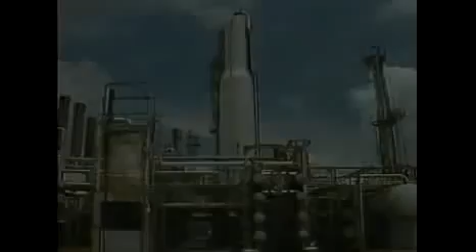One of the key elements of many process plants is a distillation system. It's important for operators to understand how distillation systems work because it's part of their job to make sure the systems run properly. The purpose of any distillation system is to separate a liquid mixture into two or more components. The separation takes place in a distillation column or tower.

The liquid mixture is called feed or charge, and the components into which it's separated are called cuts or fractions. Let's take a look at a simplified representation of a distillation system. In this example, the feed is stored in a tank. During operation, a pump is used to move the feed from the tank to a preheater. In the preheater, the mixture is heated under pressure to just below its boiling point.

The pressure in the tower is lower than the pressure in the preheater. So when the feed enters the tower, it starts to boil. The vapors from the boiling liquid, which primarily contain the lighter components in the feed, rise in the tower. The remaining liquid, which consists primarily of the heavier components in the feed, moves down the tower and collects at the bottom. Some of this liquid is drawn off as the bottom's product, and some of it's routed to a

device called a reboiler, which is connected to the bottom of the tower. The reboiler is usually a heat exchanger that's designed to vaporize the lighter components that remain in the liquid from the bottom of the tower. Vapors from the reboiler, or in some cases a mixture of vapors and liquid, re-enter the tower. The vapors then rise up in the tower. These vapors and the heat they contain are often referred to as boil-up.

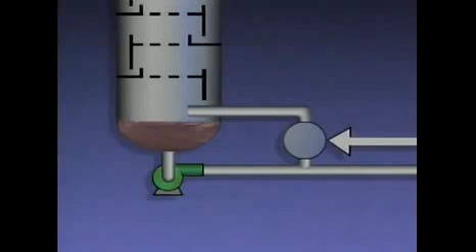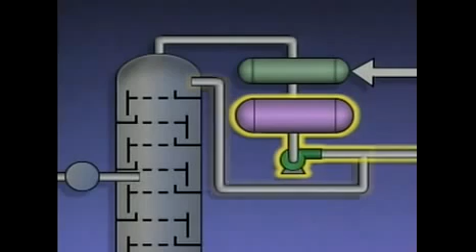The hot boil-up provides heat that's needed for the distillation process to take place in the tower. The vapors that rise up in the tower are routed to a condenser. The purpose of the condenser is to cool and condense the vapors into liquid. From the condenser, the liquid flows into a receiver or accumulator. The receiver provides a reservoir for the liquid. Part of the liquid from the receiver is pumped back into the top of the tower, and part of it is drawn off as the tower's overhead product.

Well, we've just looked at one simple example of a distillation system. Not all distillation systems are the same, but most of them have the basic equipment that we've just seen. At the heart of a distillation system is the distillation tower. Basically, a distillation tower is a series of distillation processes, or stills, stacked on top of each other. The process of distillation is sometimes referred to as fractional distillation or fractionation, and distillation towers are sometimes called fractionators. Fractionation is distillation that occurs at different levels in a tower.

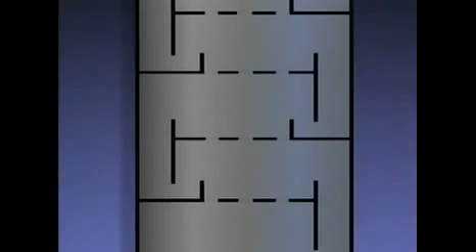This is a simplified illustration of the inside of one type of distillation tower. This tower uses trays called sieve trays to separate vapors and liquid. The trays are spaced throughout the tower. They're called sieve trays because they have many openings in them, like a sieve. Here's a closer view of some of the trays. We've exaggerated the size of the openings to make them easier to see.

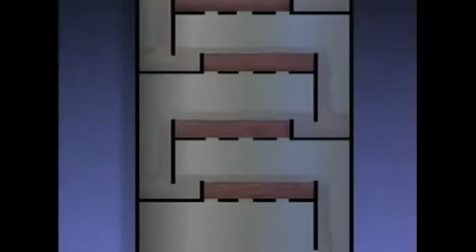The openings in the trays allow vapors to rise through the trays on their way up the tower. Each tray is also designed to hold liquid. Dams or weirs on each tray allow liquid to build up on the tray. Liquid that overflows the weirs flows into downcomers. The downcomers channel the liquid from tray to tray down the tower.

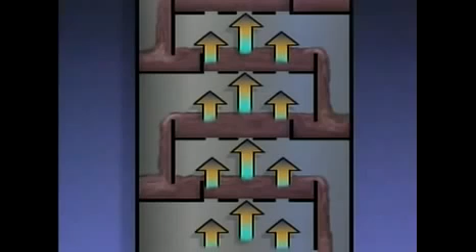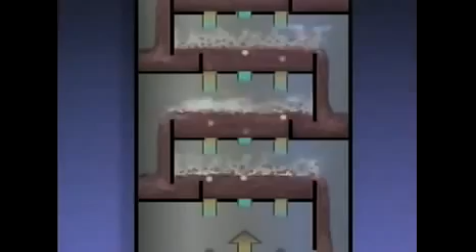When the upward moving vapors and the downward flowing liquid come in contact on each tray, the vapors transfer some of their heat to the liquid. Two things happen. The heavier components of the vapors become cooler and condense into liquid, and the lighter components of the liquid boil. The vapors then rise toward the next tray. As this process continues, the rising vapors contain a higher concentration of lighter components and a lower concentration of heavier components.

So this is how the distillation process is repeated on each tray as the vapors rise through the tower. Now, not every distillation tower is designed in the exact same way. However, every tower can be divided into three basic sections.

The middle section is where the feed enters the tower and part of the feed vaporizes. This vaporization is commonly known as flashing. So this section of the tower is often called the flash zone.

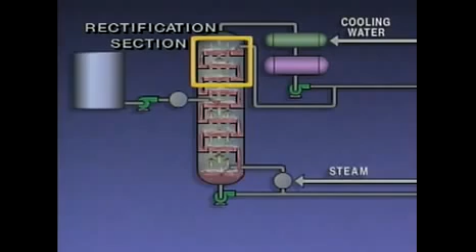The section above the flash zone is called the rectification section. In this part of the tower, the concentration of lighter components increases. The section of the tower below the flash zone is called the stripping section. In this section, the lighter components are vaporized or stripped from the heavier liquid.

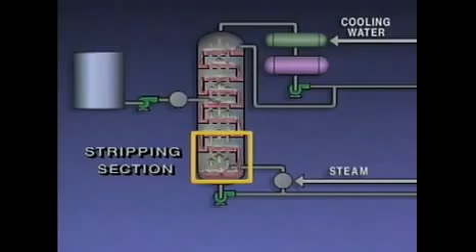If a distillation tower worked perfectly, it would produce pure products. Unfortunately, that's not the case. The lighter products usually contain some heavier fractions, and the heavier products usually contain some lighter fractions. This is sometimes referred to as overlap. Distillation systems use several methods to help maximize the purity of the products.

One of these methods is called refluxing. The vapors coming off the top of the tower are condensed in a condenser and then collected in a receiver. Part of the liquid from the receiver is sent to storage or to other units in the plant as the tower's overhead product. The rest of the liquid is pumped back into the top of the tower. The liquid that's reintroduced into the tower is called external reflux.

Because it consists of liquid that was cooled in the condenser, the external reflux is cooler than the liquid in the top of the tower. As the external reflux cools the top of the tower, vapors made of heavier fractions condense. The liquid made of heavier fractions flows down the tower and is referred to as internal reflux. Meanwhile, the top of the tower is still hot enough to keep the lighter fractions in vapor form. The vapors are drawn off the top of the tower and into the condenser.

Refluxing increases the purity of the overhead product because condensing the vapors made of heavier fractions keeps them out of the stream of vapors that leaves the top of the tower. Another method used to maximize product purity is called reboiling.

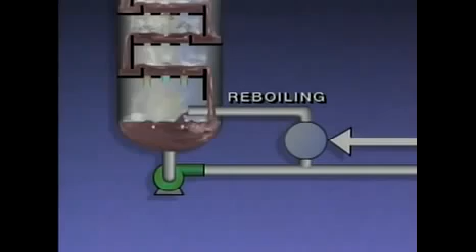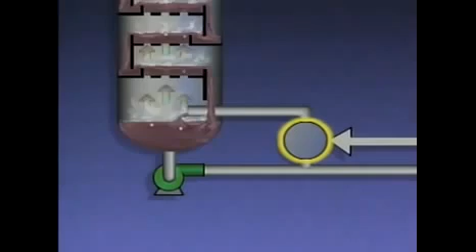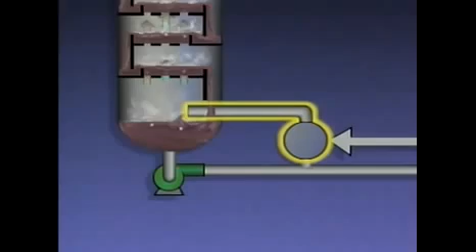The bottom's liquid that's drawn off from the tower is sent to a heater called a reboiler. The rest of the bottom's liquid is sent to storage or to other units in the plant as the tower's bottom's product. The reboiler heats the liquid it receives so that a mixture of vapors and liquid is formed. Depending on the system, either vapors or the mixture of vapors and liquid is then reintroduced into the tower. The hot vapors cause any lighter fractions in the liquid at the bottom to vaporize and move up the tower. This reduces the amount of lighter fractions in the bottom's product.

The reboiler provides the major portion of the heat that's required to make the distillation process work. In the type of system we've been discussing, the heat supplied by preheating the feed is not sufficient for proper distillation. The reboiler is needed to provide enough additional heat to vaporize the lighter fractions in the tower so that the products meet specifications.

Although all distillation towers serve the same basic function, they don't all have the same internal components. One type of tower uses trays called sieve trays to separate vapors and liquid. That type of tower is covered in the tower operation part of this program. In this part, we'll look inside two other types of distillation towers and see how their internal components differ.

Let's start with a tower that uses trays with bubble caps. The holes in each tray are covered with caps called bubble caps. The slots in these bubble caps disperse the rising vapors through the liquid on the tray. Each bubble cap has many slots, and each tray has many bubble caps to spread out the vapors. This ensures maximum contact between vapors and liquid so that maximum heat transfer can take place.

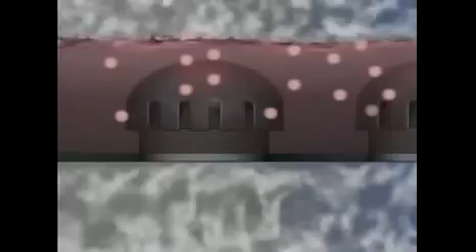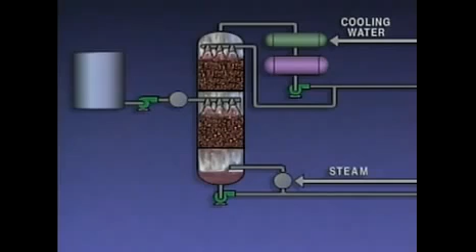Another type of tower, called a packed tower, contains layers of devices called packing instead of trays with bubble caps. There are many different types of packing. Some towers have sections that are filled with cylindrical rings like the one illustrated here. It's known as a Raschig ring. Another type of packing is known as a Berl saddle.

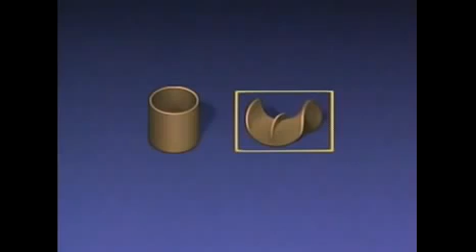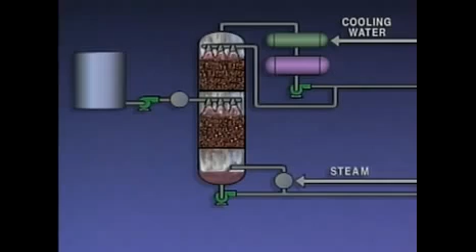The packing breaks up the liquid so that it flows over a large amount of surface area. This exposes more of the liquid to the vapors and increases heat transfer from the vapors to the liquid. Packing can be made from many different materials, including porcelain, copper, aluminum, and iron. The main requirement is that the material must be compatible with the liquid in the tower and the conditions under which the tower is operated.

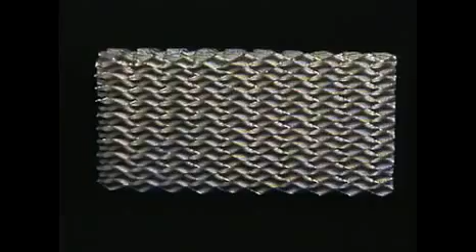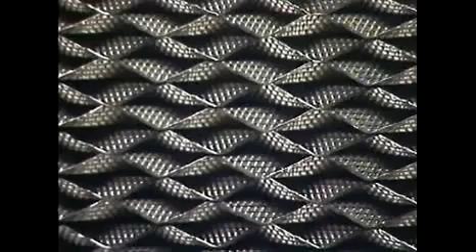This is a section of another type of packing from a distillation tower. It's called a packing grid. Each layer in the grid has spaces for vapors to rise through the packing on their way up the tower. Liquid flows over these surfaces, which channel the liquid as it flows down the tower. The packing grid provides a great deal of surface area where contact between the vapors and the liquid can take place, so heat transfer is maximized.

Temperature control is crucial to the operation of a distillation system. Correct temperatures are necessary to vaporize the lighter components of a liquid mixture while keeping the heavier components in the vapors to a minimum. If the temperatures at certain points in the system are either too high or too low, acceptable products won't be produced. Let's go over several points in a distillation system where temperature is monitored. As we do, keep in mind that the mixture we'll be referring to is a binary liquid mixture. That is, a mixture that has two components.

We'll begin with the temperature at the top of the tower. The temperature at the top of the tower should be at or slightly above the boiling temperature of the desired overhead product at the operating pressure of the tower. If the temperature at the top of the tower is higher than it should be, more of the heavier components will vaporize and become part of the overhead product, instead of flowing down the tower as a liquid. On the other hand, if the temperature at the top of the tower is lower than it should be, less of the lighter components will vaporize. Some of the lighter components will remain as a liquid and flow down the tower.

The temperature at the bottom of the tower is also important. The temperature at the bottom of the tower is usually slightly below the boiling point of the heavier component. If the temperature at the bottom of the tower is too high, more of the heavier components will vaporize and move up the tower instead of remaining as a liquid. If the temperature at the bottom of the tower is too low, less of the lighter components will vaporize and move up the tower.

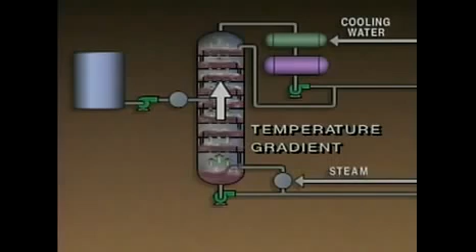While the temperatures at various points in a distillation system are important, the relationships between the temperatures are also important. The temperature decreases as the material moves higher in the tower. The gradual decrease in temperature from the bottom of a distillation tower to the top is called the temperature gradient. The temperature gradient is measured in terms of the difference between the temperature at the bottom of the tower and the temperature at the top of the tower. In order to maintain the proper temperature gradient, temperatures at critical points in the system must be controlled. Temperatures in a distillation system are typically controlled in three ways. One way is to control the temperature of the feed mixture by using a preheater.

This regulates the temperature at the feed point. At the bottom of the tower, temperature is controlled by the amount of heat that is added by the reboiler. This added heat is referred to as boil-up.

The temperature at the top of the tower is controlled by the amount or the temperature of the cool liquid that's pumped back into the tower from the overhead receiver. This is called the reflux rate. Increasing the reflux rate decreases the temperature at the top of the tower.

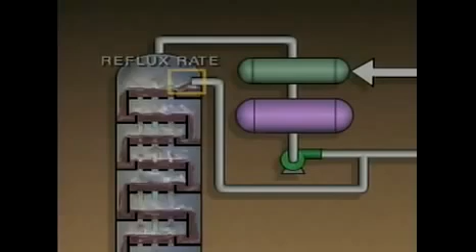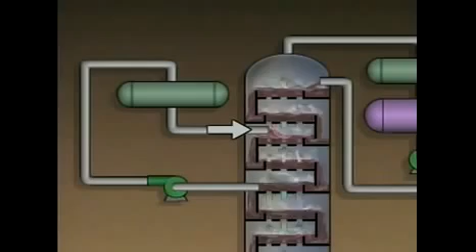Some distillation systems contain equipment known as pump-arounds. The purpose of a pump-around is to remove hot liquid from the tower and pump it through a cooler. The cooled liquid is then reintroduced at a higher level in the tower. A pump-around helps control the temperature of the internal reflux.

Since pressure affects the boiling temperature of a liquid, it's an important factor in the distillation process. If pressures in a distillation system are not correct, product purity could decrease. Tower pressure is often controlled by a pressure control valve located on the overhead receiver. This valve controls pressure by releasing vapors and any non-condensable gases that have collected in the receiver. In some cases, a vacuum system draws gases from the receiver to control tower pressure.

Another pressure that's important to an operator is the tower's differential pressure. The tower's differential pressure is the difference between the pressure at the bottom of the tower and the pressure at the top of the tower. This difference in pressure is caused by the flow of vapors in the tower. Without vapor flow, there is no differential pressure. Generally, if the rate at which the vapors move up the tower decreases, the differential pressure will also decrease. And if the rate at which the vapors move up the tower increases, the differential pressure will increase.

Changes in the differential pressure may indicate that a problem exists. For example, an increase in differential pressure could be an indication that the feed rate is too high. Too much feed entering the tower will overload it. If this happens, the differential pressure will increase, and the tower will be unable to make the desired separation. In this case, it might be necessary to decrease the feed rate.

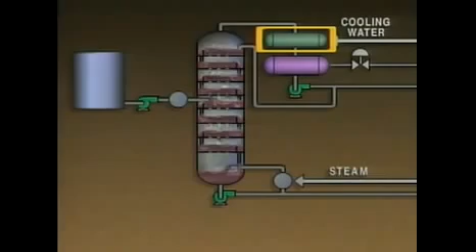Another problem that may affect the tower's differential pressure is a decrease in condenser efficiency. If the condenser's tubes are plugged or there's not enough cooling water flowing through the condenser, its pressure will increase. As a result, the flow of vapors from the tower to the condenser will decrease, and so will the vapor flow up the tower. This means that the tower top pressure will increase, and the differential pressure will decrease. If a condenser problem is suspected, the condenser should be checked, and corrective action should be taken if necessary.

Now, changes in the tower's differential pressure may have other causes in addition to the ones we've identified. So it's important to carefully evaluate any situation before corrective action is taken.

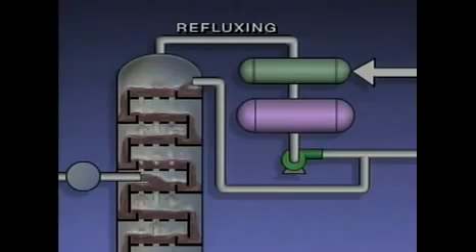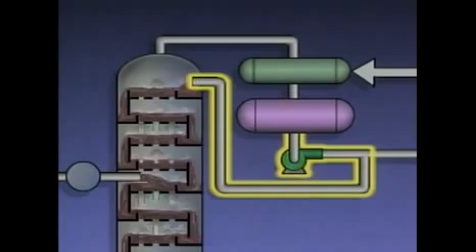One of these methods is called refluxing. The vapors coming off the top of the tower are condensed in a condenser and then collected in a receiver. Part of the liquid from the receiver is sent to storage or to other units in the plant as the tower's overhead product. The rest of the liquid is pumped back into the top of the tower. The liquid that's reintroduced into the tower is called external reflux. Because it consists of liquid that was cooled in the condenser, the external reflux is cooler than the liquid in the top of the tower.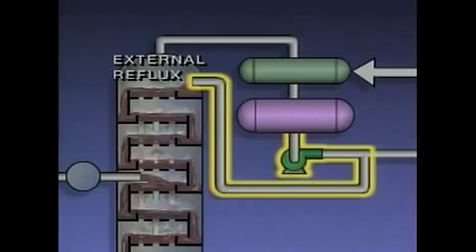In this topic, we looked at two key factors in the distillation process: temperature and pressure. Remember that although we discussed them separately, temperature and pressure work together. Both of these factors must be correct for the distillation process to work properly.

Now, try to answer some practice questions to check your understanding of what we've gone over.